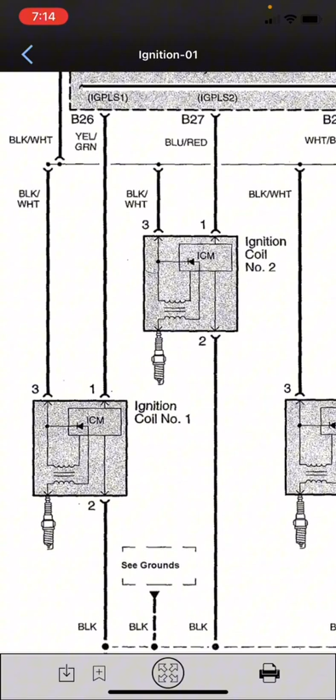This is 2008 Honda Pilot ignition coil wiring connection. As you can see here, we have number 1 ignition coil. There are 3 connectors, 3 wires.

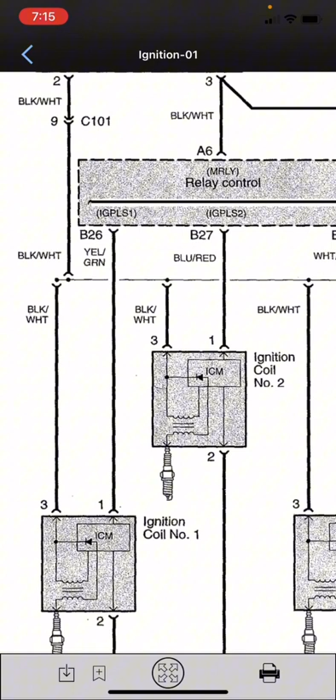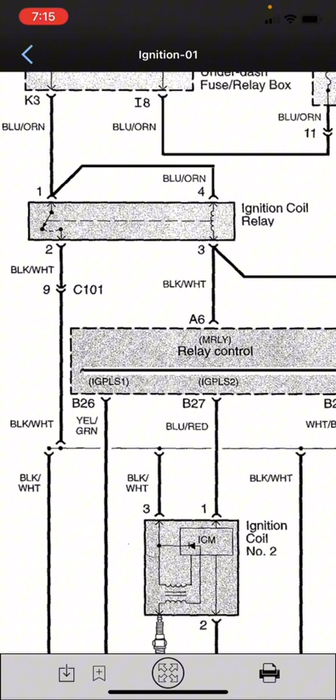Number 1 wire is yellow green, coming from the ECM. Then number 2 here is black wire, which is ground. Then number 3 is black white, coming from the ignition system line, coming from the ignition coil relay. You can see the ignition coil relay here. It's the one that sends the ignition current to the coil.

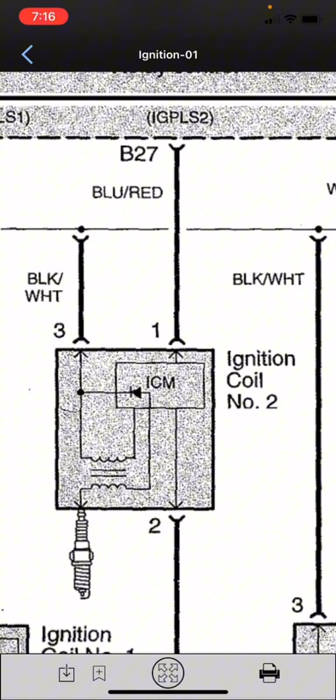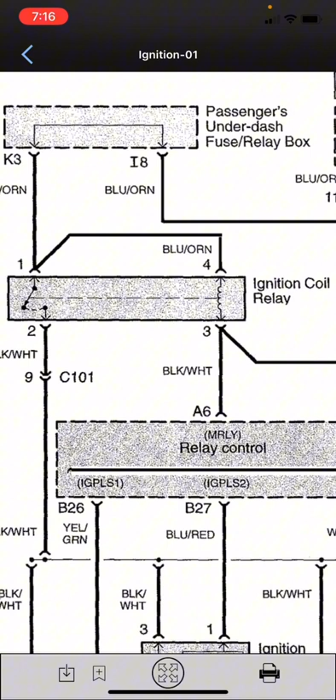Then you can see number 2 coil here. For number 1 pin, we have blue, red. Number 2 pin, the color is black, this is earth, a ground wire going to number 2. And number 3 is the ignition line, still coming from the ignition coil relay, down to the number 2 coil. This ignition system enters all the 6 coils.

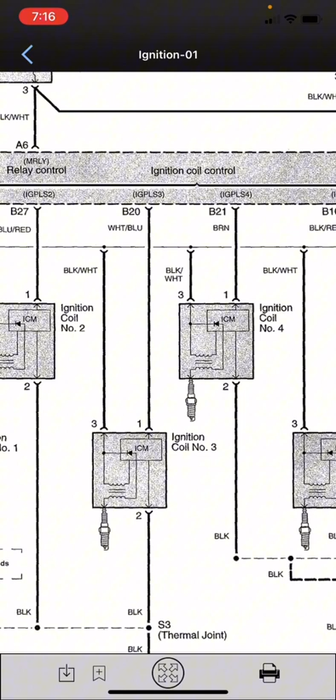You can see number 3 here, the ignition system. Black white enters here as number 3. Then earth enters all of them as number 2, black color. Then number 1 is going to the PCM, it's going inside the ECM. You can see this is the ECM, so number 1 is going inside the ECM.

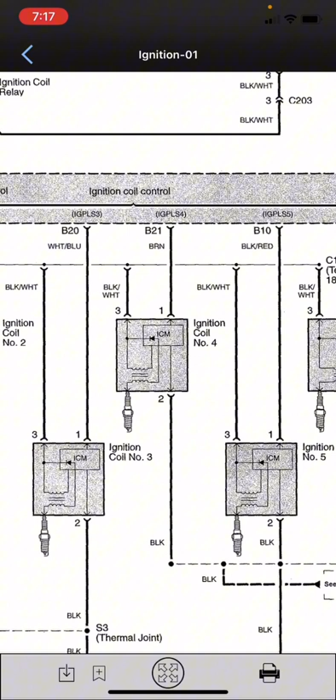Number 4 coil is still the same. Number 3 is the ignition system that enters all of them, and the earth, the ground system, enters all of them in number 2. And then number 1 enters

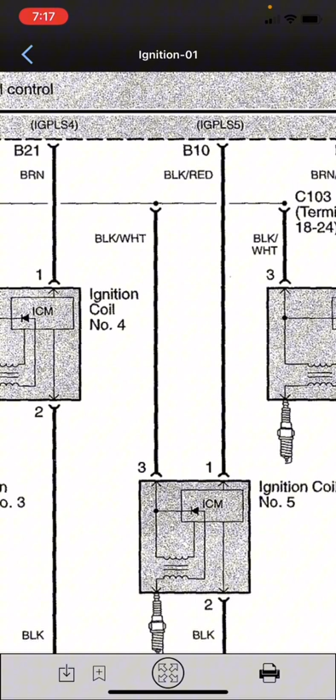the ECM. This is number 5 coil, black, red, which is number 1, going into the PCM. Number 2 is the earth, black. And number 3 here is black, white, which is the ignition line.

Then the final one is number 6 here. Number 1 is brown, white, going to the PCM. Number 2 is black, which is the earth. And then number 3 is black, white, which is the ignition system.

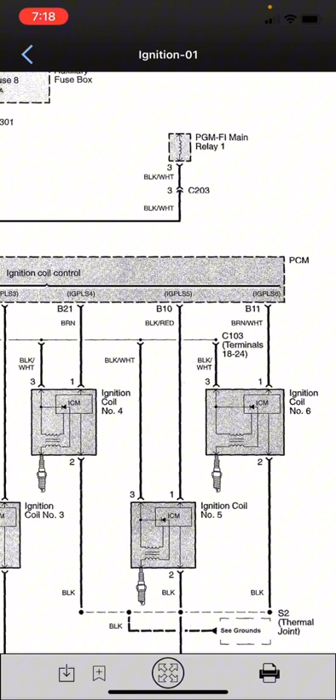So this is the ignition coil connection. This particular place is the PGM-FI main relay 1 that supplies ignition to all the 6 coils. This is the relay that supplies, called the PGM-FI main relay 1. So that is the full connection for the ignition coil in Honda Pilot 2008.